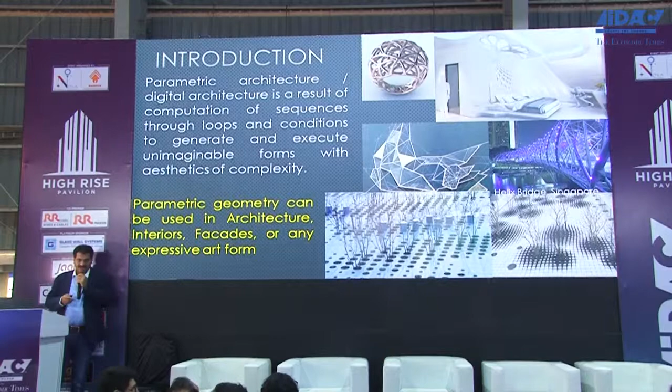So the parametric architecture or digital architecture, what is it? It is just a... Girish, you have to give the lecture.

So this is a sequence of loops and conditions, and we generate the form or the drawing which is unimaginable, undraftable - you cannot construct it on site. So you can really create very complex geometries. Parametric geometry can be used in architecture, interior design, fashion design, landscape architecture - in every art form.

Now why do we do parametric design? Because, as I said, we can create organic and complex shapes through various form-finding methods. When we say form-finding methods - in parametric softwares there are different tools that help you find the form which suits your requirement, things we cannot otherwise imagine. You can rationalize these forms, and then depending upon the requirement, material restrictions, and their properties, we can rationalize the whole built form. We can do interactive structural analysis.

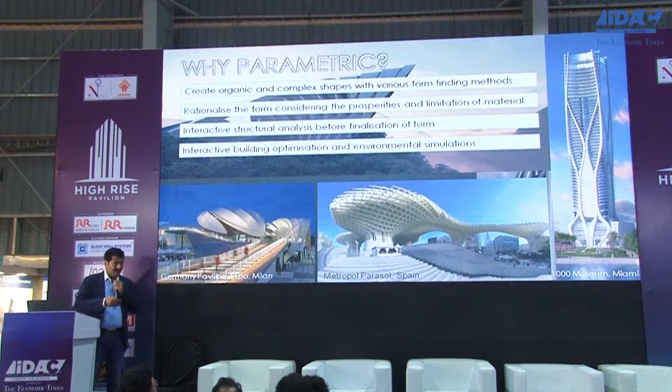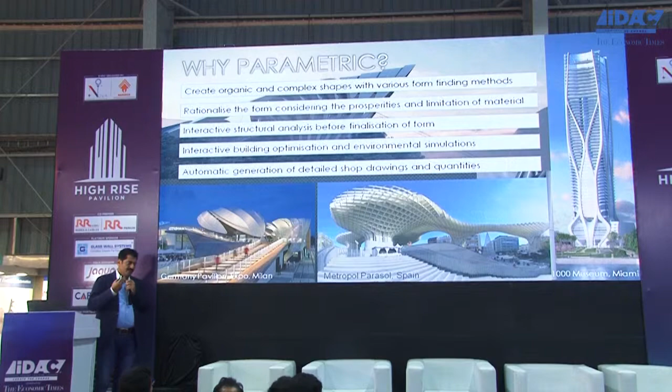We can do optimization in different environmental simulations. And then finally, as Jay was saying, the final output is always the shop drawing, which is directly fed to the CNC machine. I have come to a conclusion that whatever you do on parametric softwares, unless you use technology even for construction and execution - with the use of these CNC machines - you cannot actually execute them the way you want.

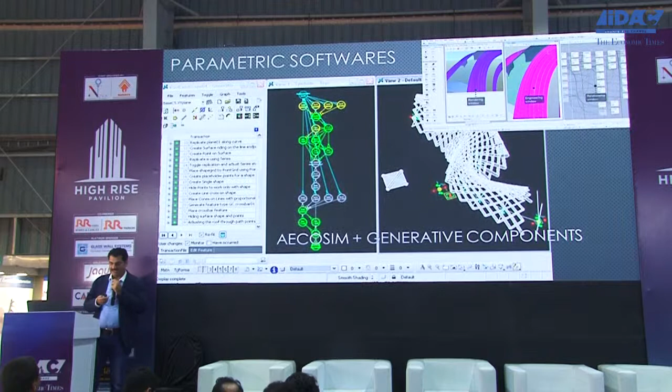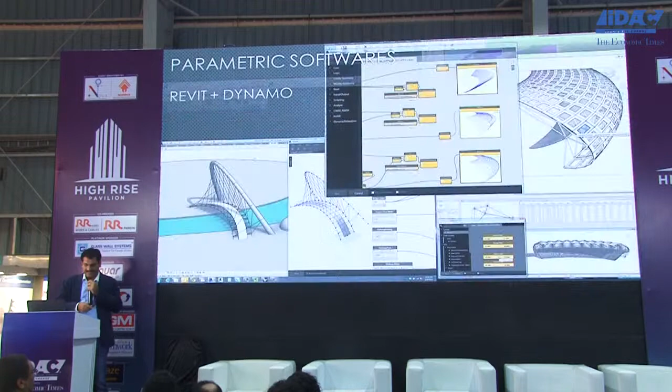Now there are different softwares. I started with a very basic software called Revit. I started using Revit in 2006, and the day they introduced a plugin for that, we started with it. Then a powerful software called AECOsim and generative components - we also tried that. Revit and Dynamo was my first experiment. Then finally we stuck to Rhino and Grasshopper. So most of my study, most of my experiments, are on this platform.

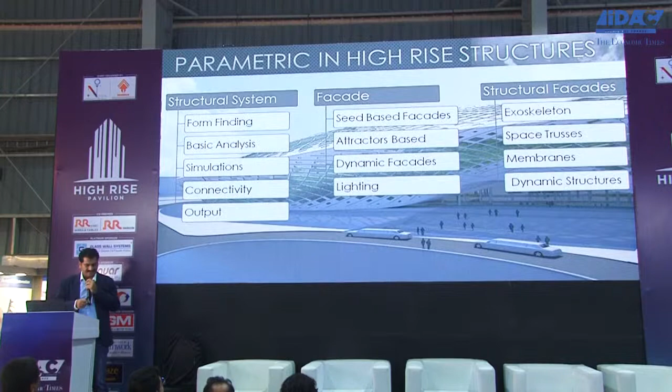Now when we talk about high-rise structures, where are we using parametric designs? In structural systems we can use it, in facades we can use it, and we can also use it in a composite way in structural facades. So the first is form finding, basic analysis of that form, various simulations you can do on it, connectivity of these parametric softwares with other softwares, and then finally the output.

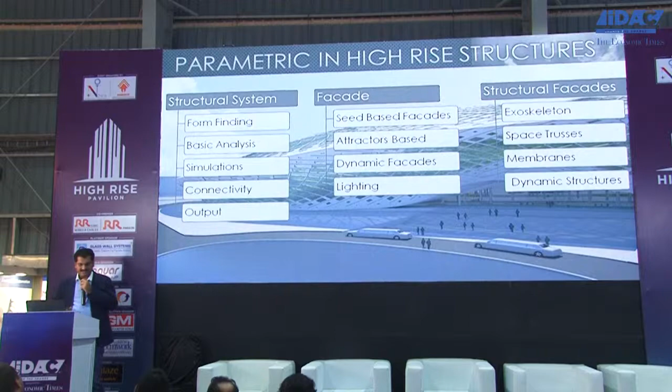In facades there are different types, we'll discuss that. And then structural facades like exoskeleton, space trusses, membranes, and dynamic structures. Now these are very futuristic. We need not go into that futuristic approach, but for any architectural design, you can use digital platforms like these parametric softwares, and you can come up with something which is very different.

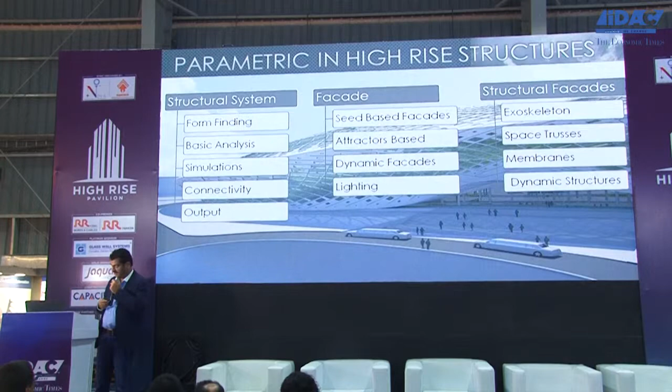So everything starts with form conceptualization. We use various software for even form conceptualizations, but then...

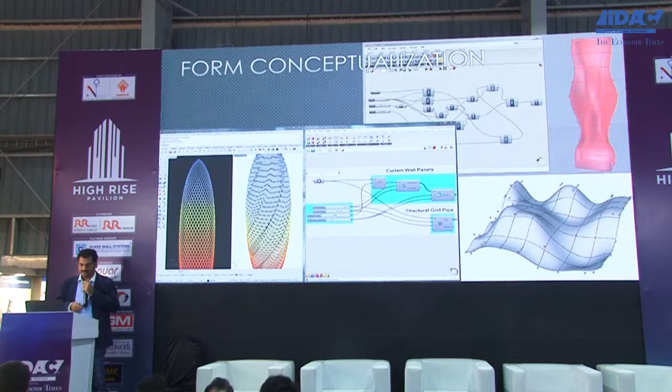So when we start designing a structure, the algorithm, the parametric software gives you full flexibility where you can actually decide on the final product at a very beginning stage. In a general system, we start with basic 2D drawing and reach the 3D drawing. Here the whole process starts with 3D and ends at 2D drawing.

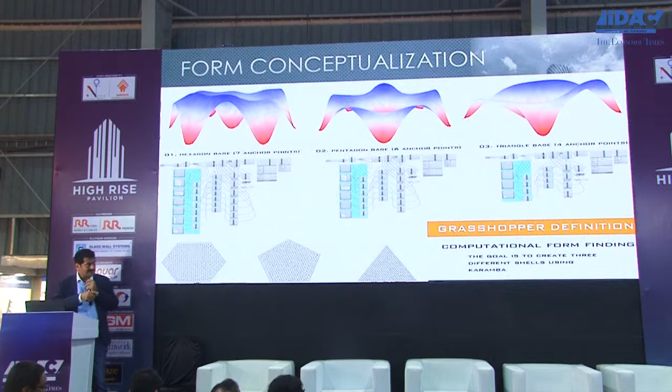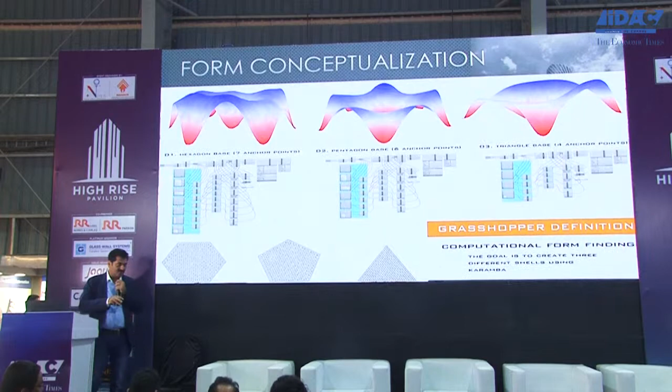So for example, if I make one single definition of an algorithm, by just a flick of a button, I can see the result where I get 7 supports, 6 supports, or 4 supports, and I can check, putting various checks onto it, I can see the possibility, the rationality of that structure.

This is one of my most favorite plugins. It's called T-Spline, an Autodesk plugin, and it runs in Rhino. Most of the buildings designed by international architects, in their presentations abroad, they have talked about this plugin, so we started exploring that. It's like clay molding, and you can create a form.

Unfortunately, in the latest versions, because Autodesk is a different software company and Rhino is a different one, they stopped supporting the new versions.

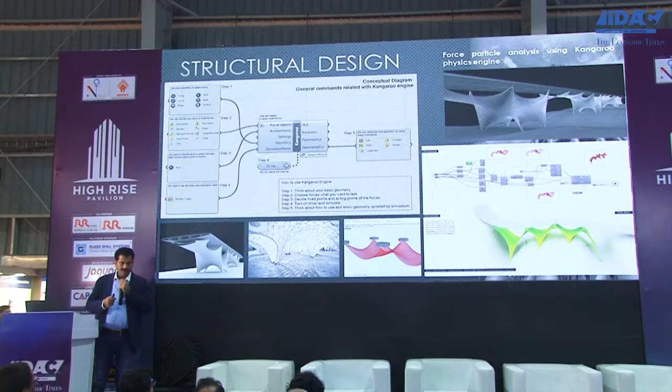You can do the structural design of these structures even before you complete the design. So these are a few plugins, like we use the Kangaroo physics engine for smaller structures, and we also tried a plugin called Karamba.

Now we want structural engineers to explore this further, because eventually most architectural firms are going to shift to these software, and plugins like this can help them a lot.

So you can see in the plugin, when we simulate, each and every node's displacement is measured and given, and depending upon the structure's characteristics and properties, we can decide whether the structure is going to stand stable or not.

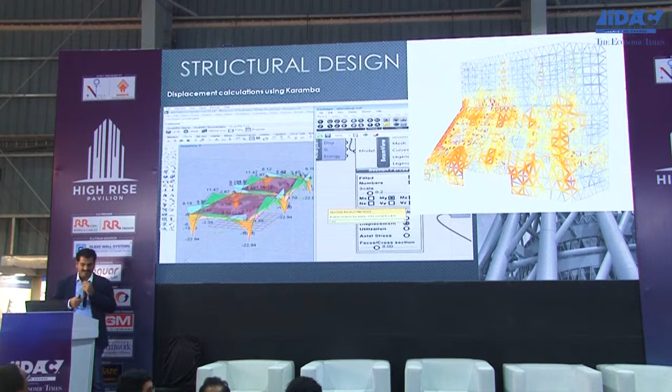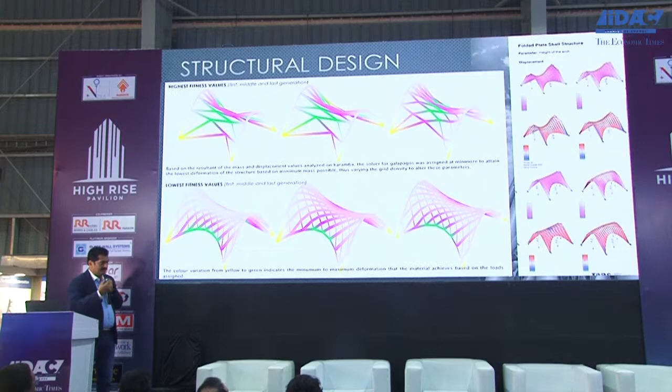And when I said interactive, you can see on the right hand side, it is giving me the form, and it is showing me in color the stresses, so that while designing the form itself, I can actually check the stresses, and I can fix the form. So that is what is interactive form finding method.

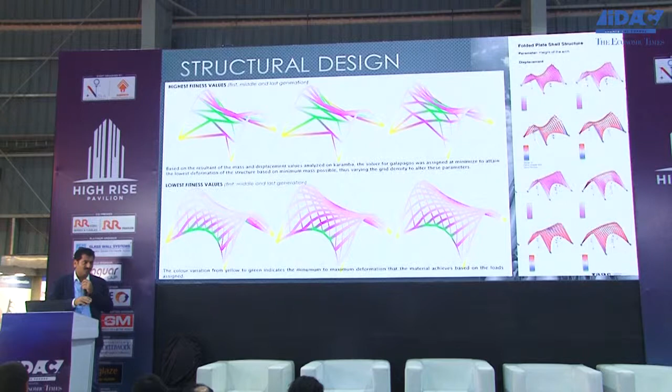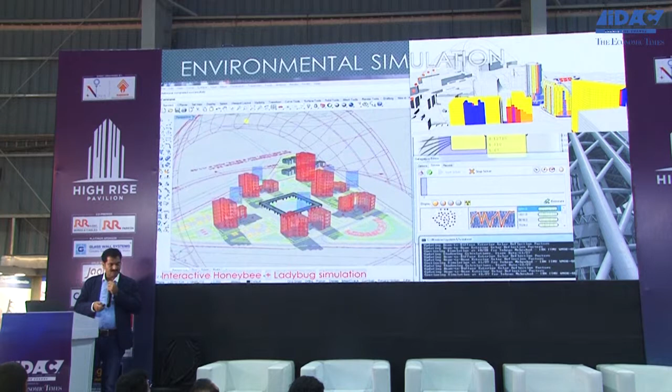Then there are different environmental simulations. These are plugins available in Grasshopper. We mostly use Honeybee and Ladybug. These software do various shadow analysis, solar control and radiation control, and even fluid mechanics.

So something like this can be done in Honeybee and Ladybug simulation, where it is actually showing the reflection of light falling onto the plaza in between two buildings.

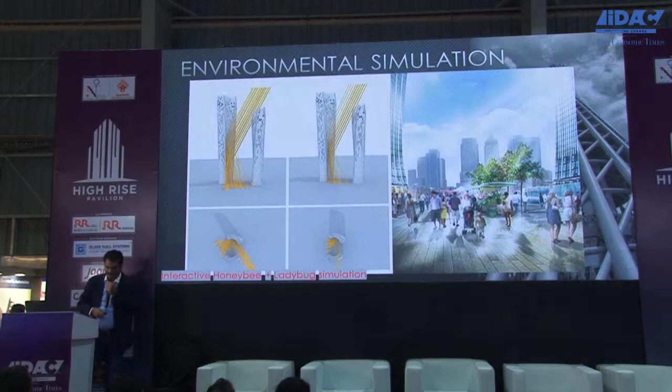Then you can do different simulations with Honeybee, including light penetration inside the building. The daylight factor you can actually see.

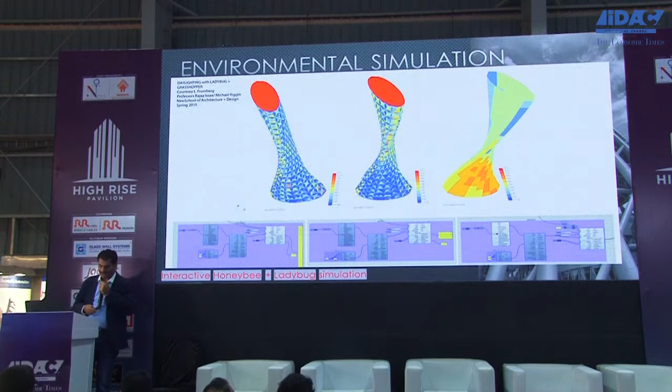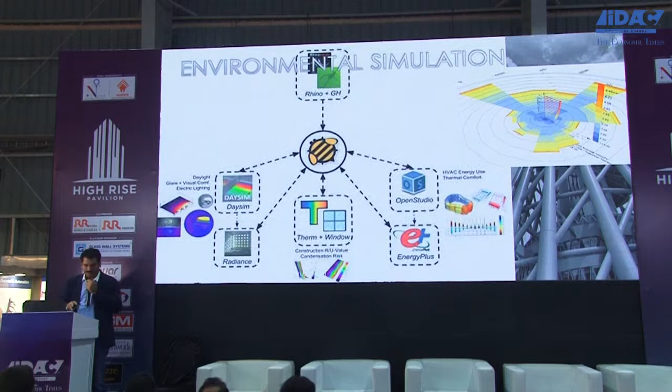And the best part is that Honeybee can connect your Rhino and Grasshopper with various other software. It supports different platforms like Daysim, Energy Plus, Open Studio, Radiance, and it's a to-and-fro kind of connectivity. You can connect this with your Rhino and do it interactively.

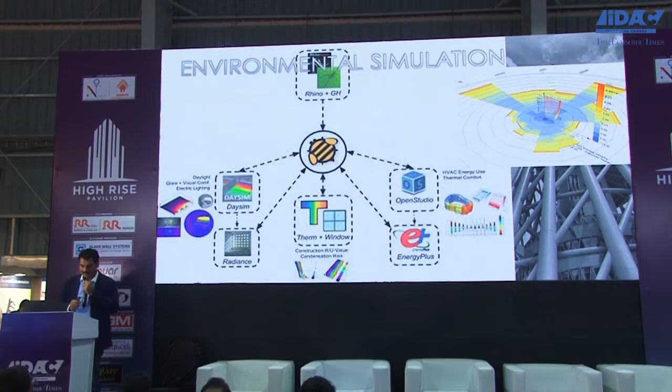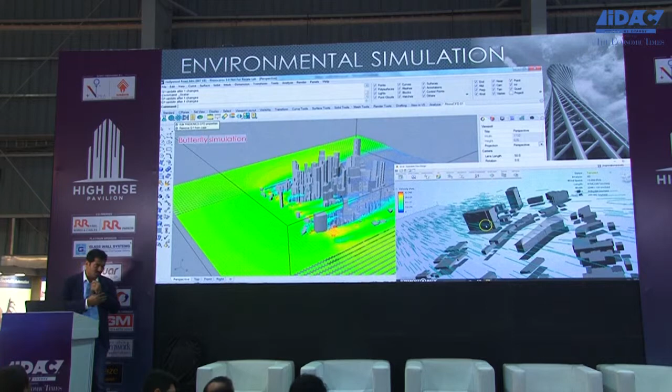With one more plugin called Butterfly, you can also do simulations for wind and also something like tsunami, so you can actually check how the whole city is going to behave in case of a tsunami.

So when we say form rationalization, the first thing is always depending upon the material, the sizes available. You can always write the algorithm to check the viability of your design.

Then you can optimize your structure by structural design, as I showed you. You can check its structural stability, you can check its facade simulations, and eventually, depending upon the machine you are going to use for final production, its characteristics and limitations, you can utilize that into your algorithm.

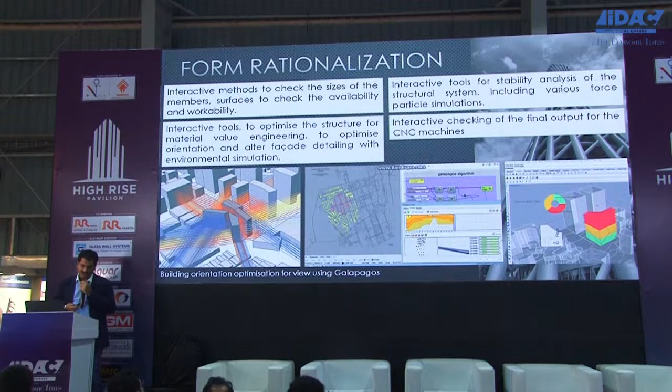This is an older subject where we wanted to connect our parametric software to building information modeling. We used to use software called Geometry Gym, which connected Grasshopper with Revit, and we got the output directly in Revit.

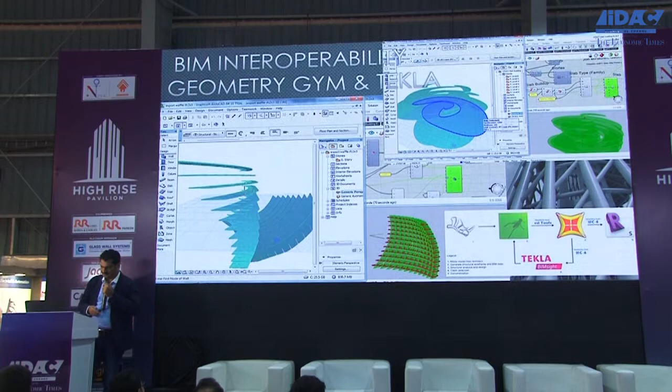But now with the latest available software, there is a very good combination. There is a direct connection between ArchiCAD, Rhino and Grasshopper, with a kind of interconnectivity between these software.

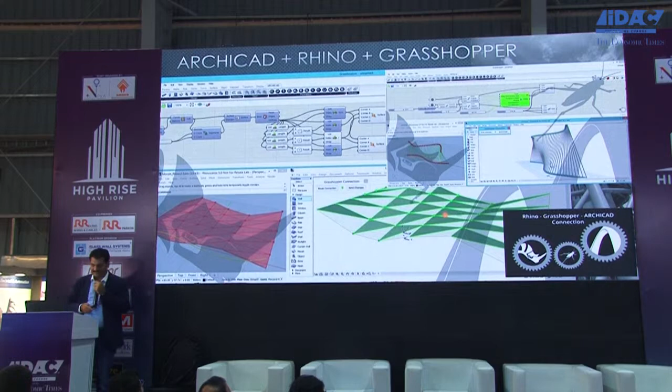So this was from the structure point of view. When it comes to facade, when we go for a high-rise building, I'll take you through a very fast journey of this because facade is a different subject altogether. Last time I tried to give this lecture, it was like a 1 hour lecture.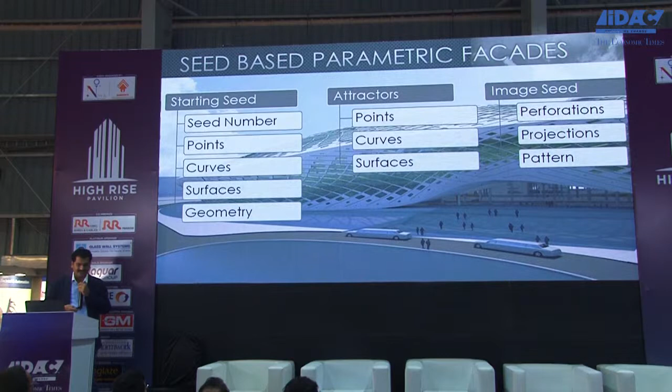So when I say seed-based facades, you can always start with something like a number, a surface, a line, or just a collection of points to start your definition of algorithm, and you can develop a geometry. So here in this case, we have got two sets of points automatically connected through an algorithm, through lines, and see the end result.

Finally the end result is those geometries. Now if you change those seeds, if you change the set of these points, the result will be something different. So in all these algorithm and parametric subjects, you don't really draft a drawing, but you write the definition of the aesthetics, and once you change the seed, you get a different output altogether.

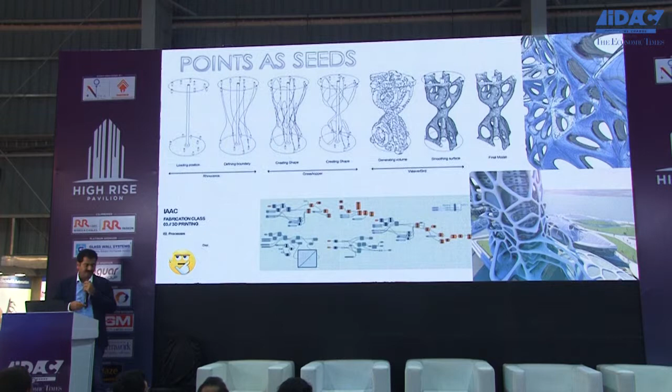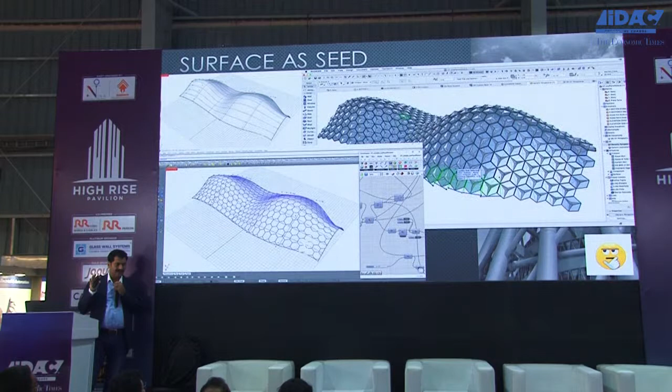So here I have used one definition on different surfaces. A variety of these surfaces are there, and see the results. Here, if you want the same into a facade, you take one geometry, you write a definition, here the surface is the seed. You change the surface, you will get a different result.

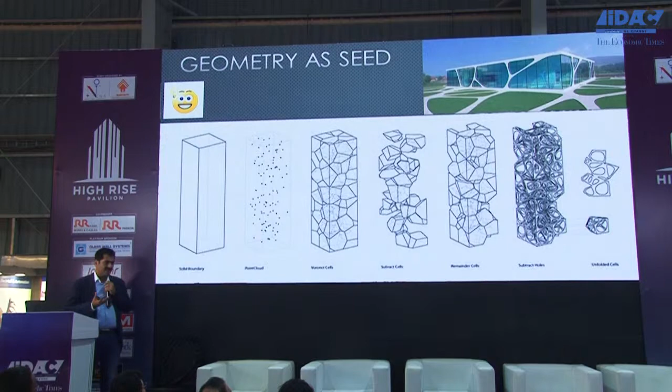You can use geometry as a seed. Here I have taken just one block, and then randomly the points are generated inside, and there is something called a Voronoi pattern that gets generated. Now if instead of this block I give a sphere as a seed, it will give me a different result altogether.

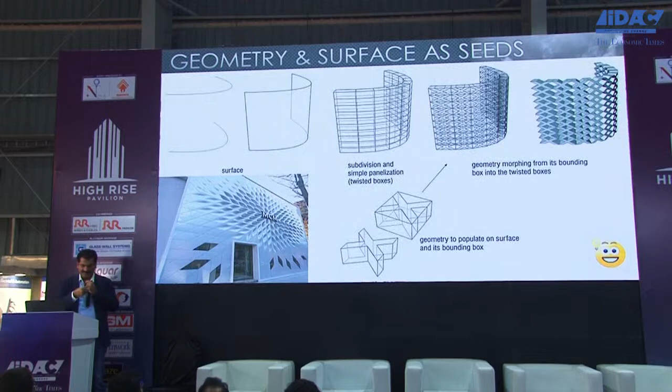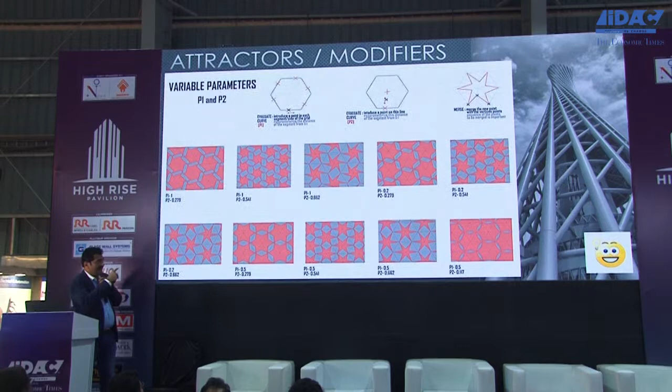Now when I want to make it a little more complex, I give some variables to this subject, like P1 and P2. If I give P1 and P2 variables and connect them with the location of that particular surface, we'll possibly get different iterations. So with the same one definition of aesthetics, I can generate a number of iterations, and that helps in how I use that into my design.

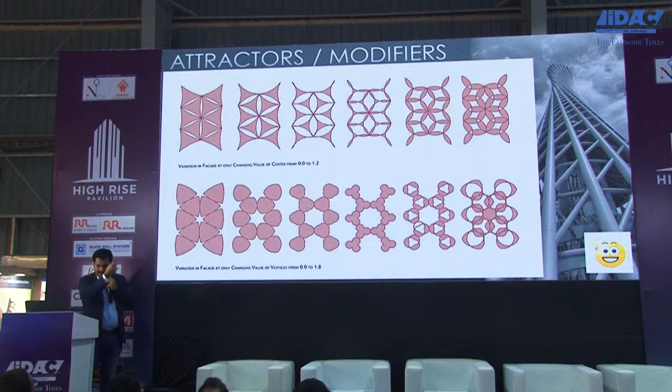So these are different sets of iterations. Same geometry with some variation gives me something different, and when I put it onto one surface, instead of a simple seed, I am using a variable seed. That variable seed will give me something like this.

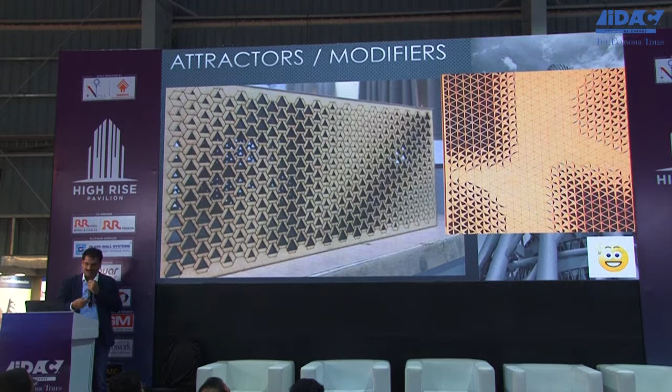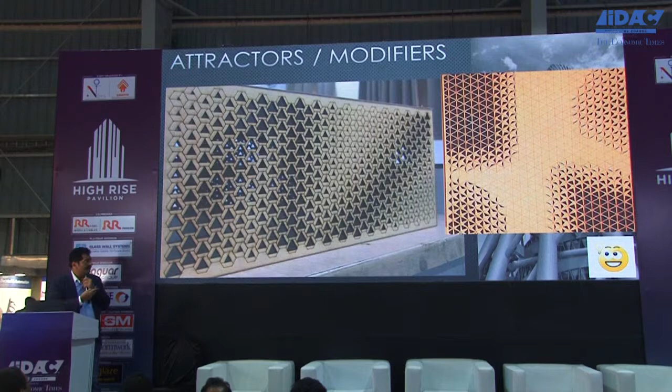So we call them attractors. Now here there is a curve which is visible. That curve was one of the attractors. Depending upon the location of an individual member with respect to that curve, it gives me a different iteration, a different alternative of that geometry, and that is how I am forming this complex shape.

These are a few examples. So we always know they look nice, but how we make them - that was the basic of it.

We can use them on high-rise buildings. This way you can make a very monotonous facade into a very interesting looking facade.

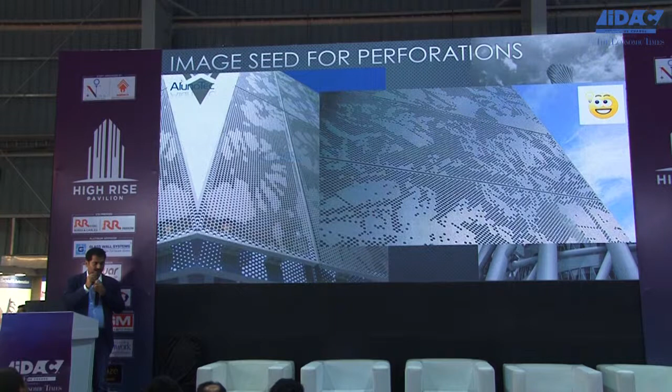So you can even use an image. An image can be your seed. You supply an image, any image, to your algorithm, and depending upon the image - the intensity, the brightness, or the color hue - you can actually give a different geometry to your facade.

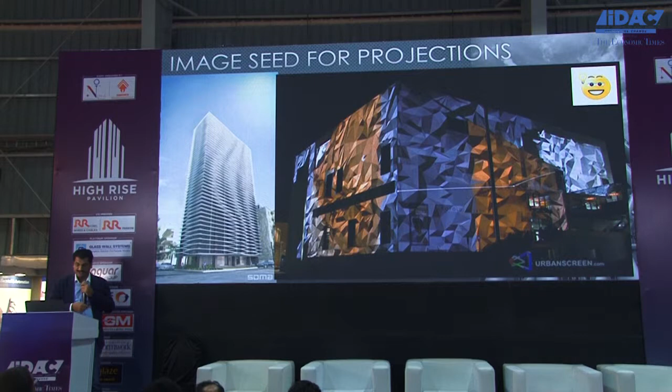Even something like this, where you are using that for projections instead of perforations, or something like this, where you can actually bring some triangulation with the help of some geometry.

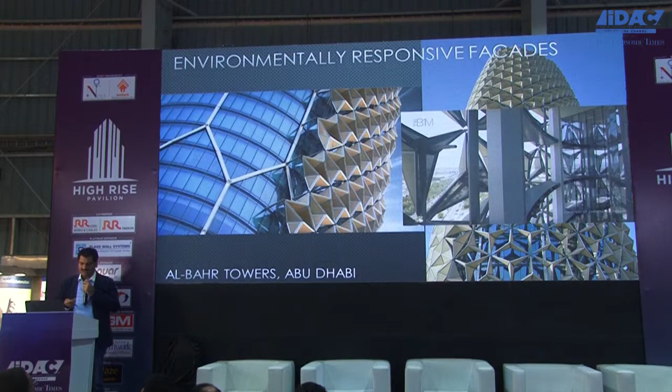And then there are these complex kinds of facades where you can see they are changing their shapes, reducing and increasing the openings depending upon the requirement from weather and climatic conditions. These are environmentally responsive facades, and it is proven that they give a lot of savings in energy consumption.

So there are a few more examples like this, where you can see those fins closing down and opening, controlling the light inside.

Or something like this, where the facade is moving. So these are basically dynamic facades.

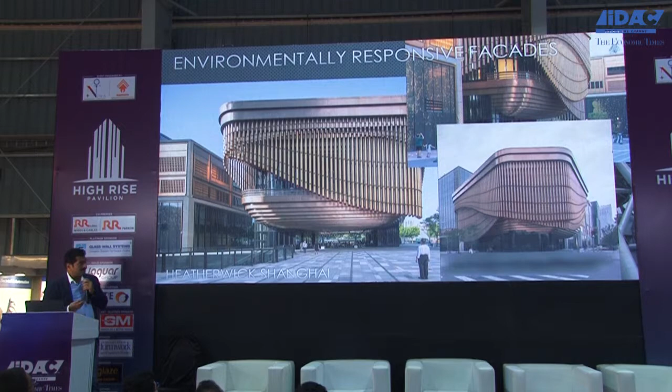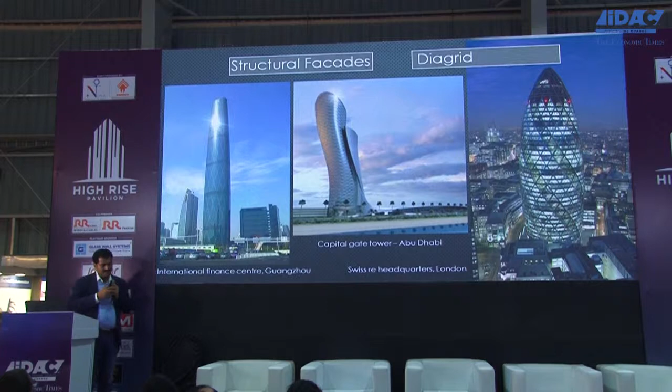Now when it comes to a composite of facade and a structural system, the most popular today is the diagrid. We saw in Carl's presentation that most of the time abroad they have a central core and peripheral columns. So instead of just having simple peripheral columns, there is a technique where you can use a skin developed with parametric software in a diagrid fashion.

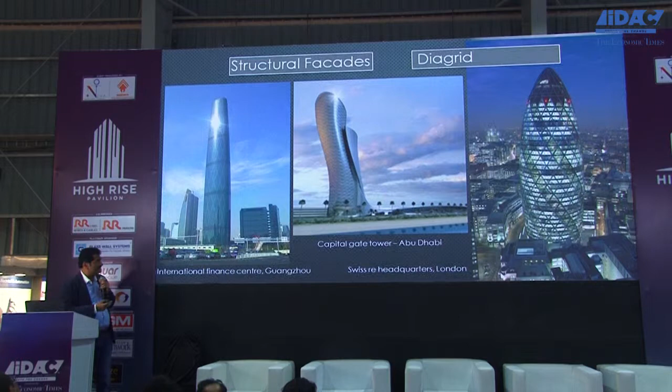So these are a few examples, and this is getting a lot of popularity abroad, even in India. Somebody is quoting that the first parametric diagrid facade is in Hyderabad, with those four towers coming up. I don't know whether Carl's firm is involved in that, but Sir Norman Foster is there.

This is the excessive use of the technology. We went to visit this structure in one of the CTBUH conferences. After the presentation was over, we decided to see this building. We went there and thought this is really ugly, but it is something they achieved with a lot of effort. I don't think the effort was worthwhile, but the building is unique.

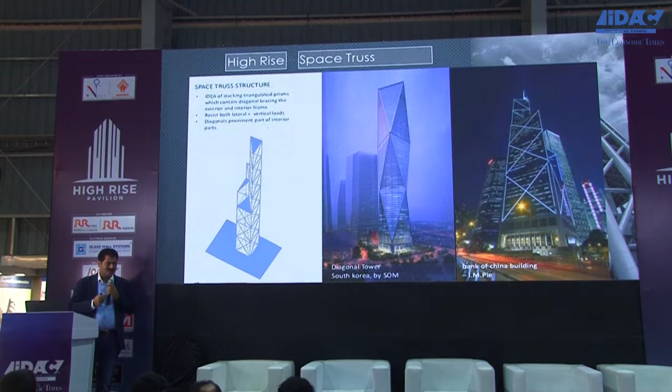The other way you can use parametric software for form finding is space trusses. In space trusses, you can evolve a form and do a number of iterations. Like Jay was explaining in his previous presentation, with a seed you can develop almost 10,000 options. He took 10 days, but the software actually takes only 1 minute, so you can generate 10,000 options in 1 minute and then select one out of them.

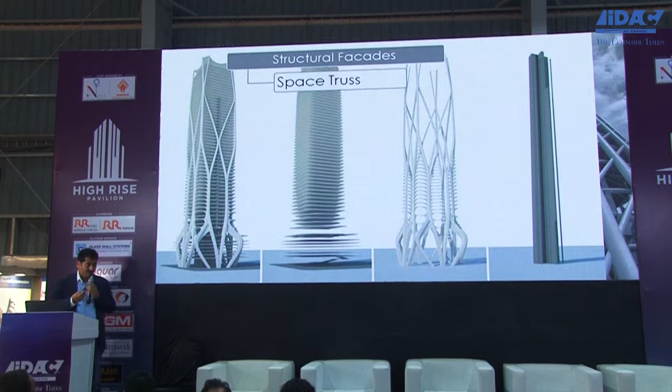So these are some examples. A space truss, a complex form can be developed. You can use membranes for structural facades. This is an age-old example. The first of its kind, I think this was the first tower they built, 50-story plus in Dubai. And finally the boldest experiment they did is this rotating tower. Because of that parametric shape of the software, it's not just evolved as a parametric design, but it's going to change all around the clock.

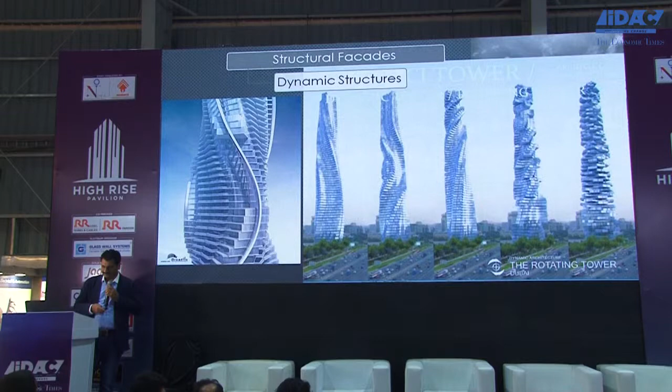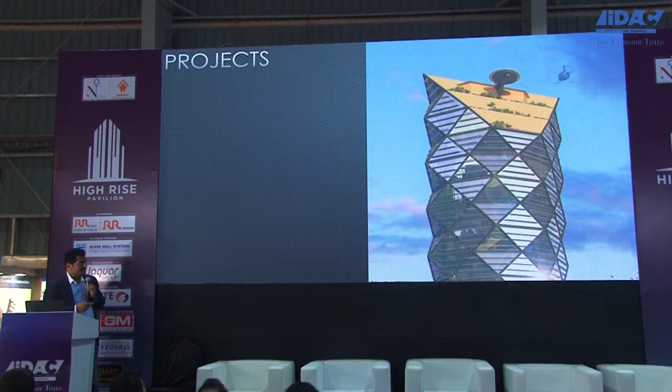These are a few projects we are experimenting with. We tried parametric use first in one of my projects, One Avighna Park. We designed its crown with this parametric approach, and that whole structure is like a 12-meter tall steel structure from the terrace level. This is a 61-story building, the tallest residential occupied building in the city, and this crown was to be erected on top of it. We calculated each and every joint through the software, and now it is complete.

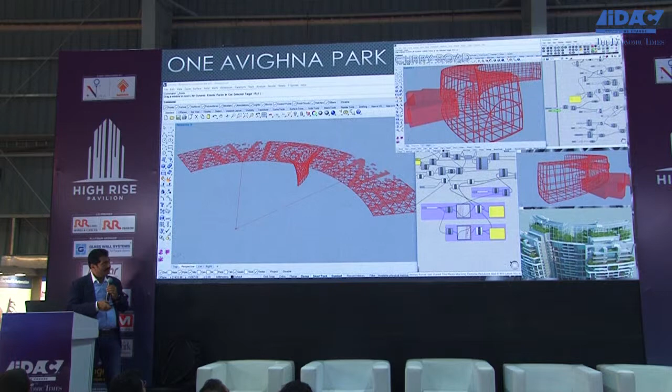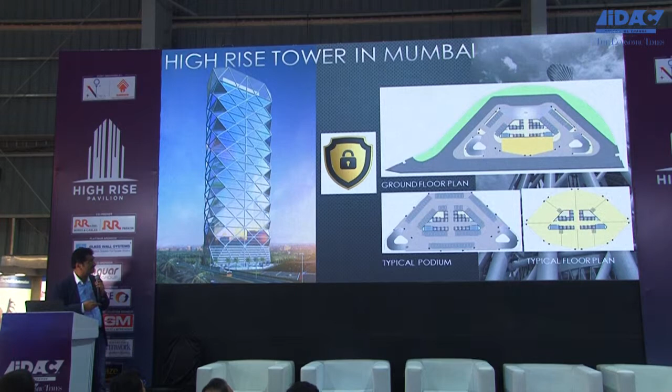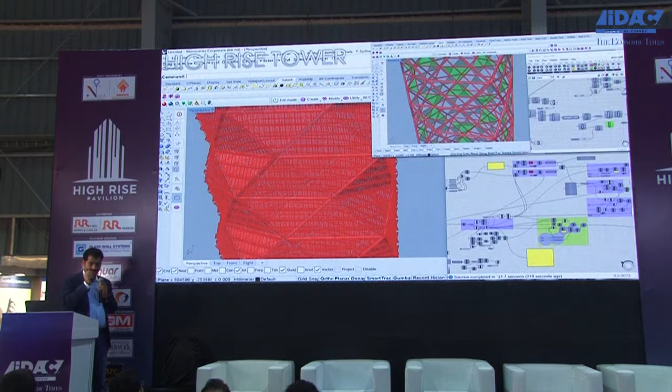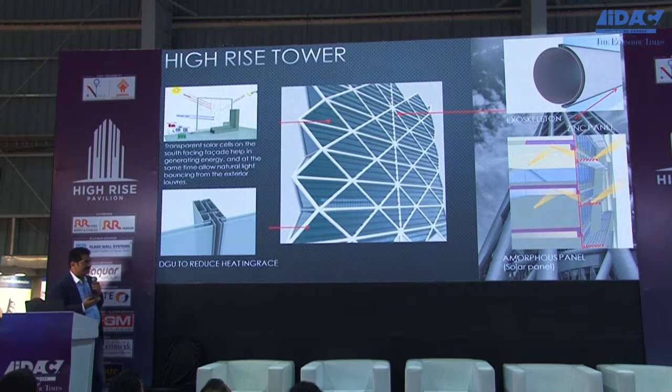It's already occupied as well. Now we are doing one more building, this one in diagrid. This is supposed to be the tallest and biggest commercial building in Mumbai. The work is already allotted. Tata Projects are the contractors for this, and we did the whole design on algorithm, including each and every panel and each and every mullion designed. As I said, the exoskeleton is the next popular subject that is going to be there in India as well.

This is the next project we are going to do. This is supposed to be taller than the Eiffel Tower, 30 meters taller, somewhere in Gujarat—I cannot tell you where. We are doing this for Steel Authority of India. When they announce it, we are at the finalization stage of the design.

And I'll invite Girish to explain the next slides. These are your slides. Hope you know them.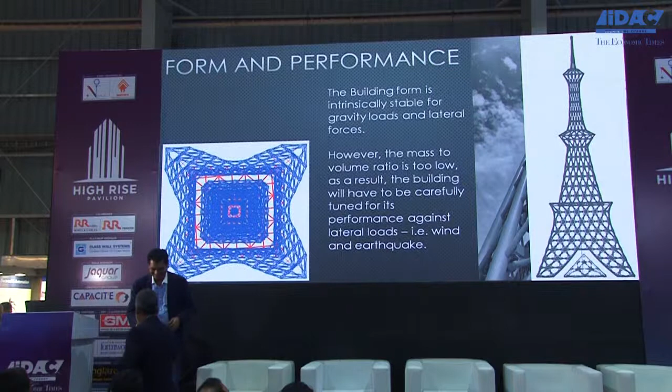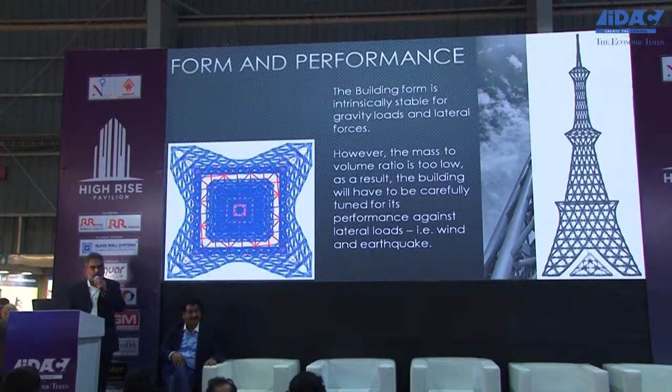Vivek approached me with this unique project. SAIL, Steel Authority of India, wanted to build a building in steel, and somewhere—now he's talking of Gujarat, but when he approached me the location was not finalized. As a structural engineer, we get into the rut of earthquake zone and wind zone and soil parameters and all that kind of stuff. But when he explained to me how he came up with the concept of the shape and the facade, I said okay, let's take a back seat. The structural design is not important.

It's going to happen. In fact, I don't have to do any structural drawings, because this is one kind of building where the form itself, the facade itself, is so much structural. It's going to be a self-supporting building, and whatever I do is just put it on paper or in some kind of software, give a file to the contractor who will CNC the facade elements and fabricate them. This is all we are going to do.

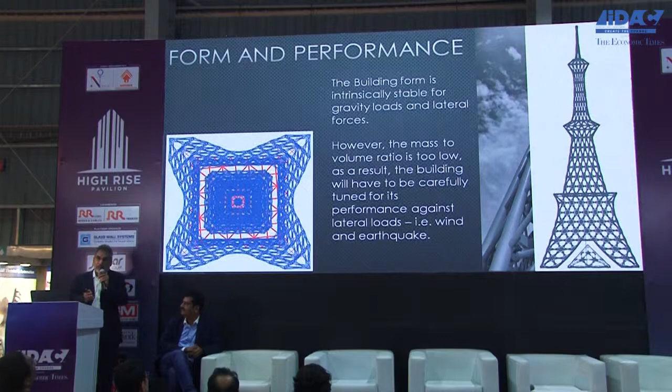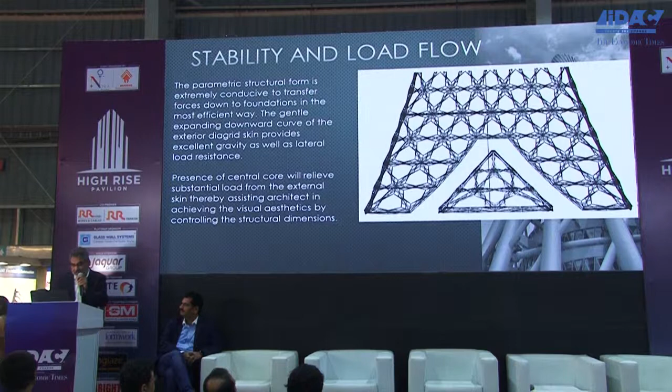As regards the location-based parameters like earthquake and wind, I'm sure the software itself—when he says the structural design will happen in the initial stages itself, when he's making the form of the building—all those input parameters can be fed into that software itself. Everything will be confirmed, and in this geometry, the geometry itself is self-stabilizing. It's a tapering building, so as an overall form there is no much structural challenge here. The problem will lie only with the load flow.

The gravity and the lateral loads have to reach the foundations, and the diagrid system followed here is an excellent way of transferring the forces to the foundation. So there is no problem.

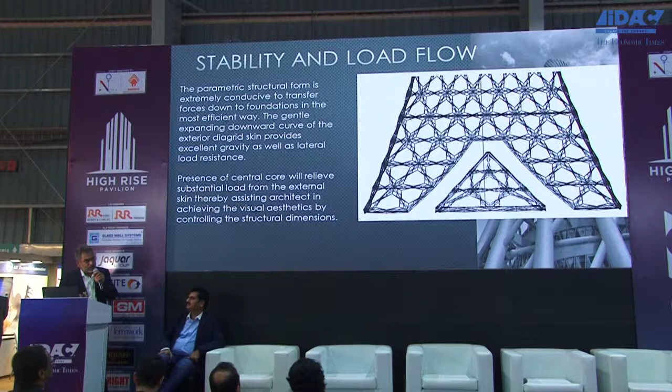But to be on the safer side, we both decided that let us have a central core as well. In any case, this was required because there is a restaurant on top of the building, as you can see here. So you have to reach that place, and in any case, you will need vertical transportation. So the cores required for vertical transportation themselves will add to some kind of stability.

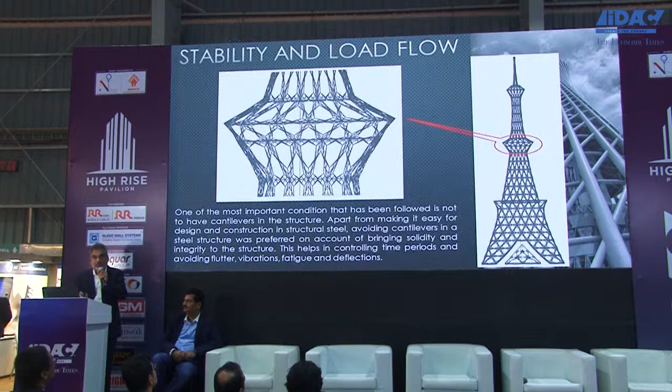There was some other discussion regarding how to make this form integral. And instead of having a cantilevered restaurant, we decided to just have the form itself take the shape. You can see the highlighted portion where the form has been curved to create that bulb kind of thing which houses the restaurant. So that adds solidity to the geometry.

Although the title of the slide is Fabrication and Erection, I don't believe anybody is going to have fabrication drawings to make this kind of stuff work. Every star-shaped panel will be of different dimension because the building is tapering, the number of stars are changing. So this is going to be completely automated fabrication, which is possible nowadays. We have been doing some very complex buildings where it's not possible to draw fabrication drawings.

Everything will be given in the form of algorithm files to the contractor, and the CNC machine will take the inputs and start cutting the plates, the members, and even the welding will be done automatically.

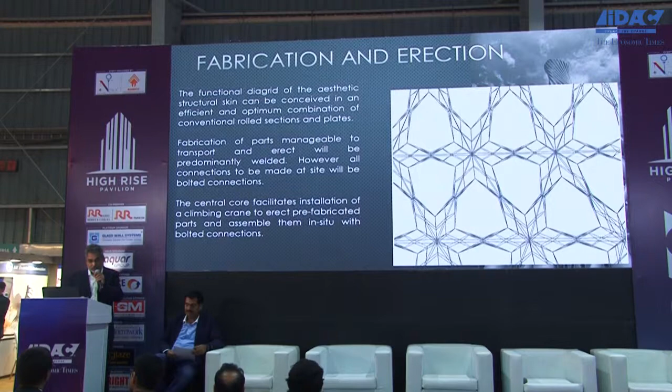So major parameters, of course, will be wind and all that, and it will be taken care of. We have designed this building for the entire range, 44 meter per second to 74 meter per second. Probably RWDI will get this project very soon to have it tested in a wind tunnel.

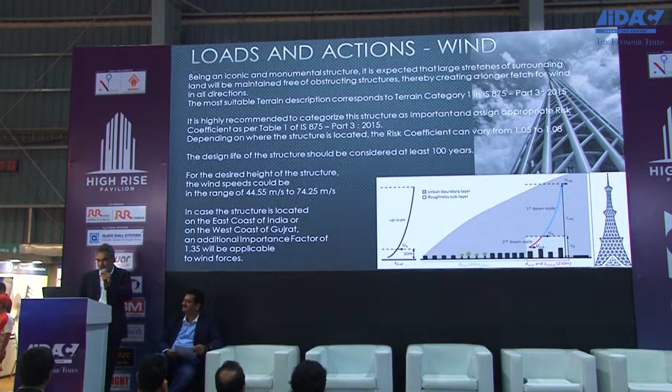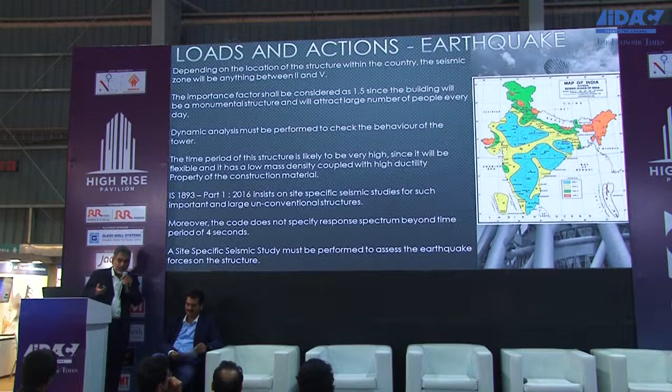I think for the earthquake zone, again, it was not decided where the building was located. In any case, this form is so stable, I'm sure I can build it in any earthquake zone in India. What will change is maybe the plate thickness of the steel here and there, but it's going to be absolutely fantastic. The most important aspect of this building, however, will be the foundation.

This is going to be a building more than 300 meters tall. What is the exact height? About 300 meters. So the toppling effect is the only thing that I have to tackle at the foundation level.

The wind-induced toppling has to be resisted by a mass at the base. Remember, this is a steel building, so the building itself will have very small mass compared to its volume. So earthquake is not all that important a factor, but the wind is.

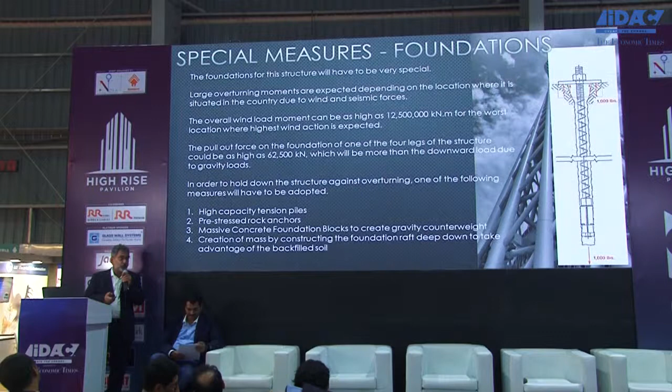I have to create a massive foundation to stabilize the building, and probably that will be the toughest challenge, because even our concrete technology is not all that advanced as our steel cutting technology is. So I think that will be the major challenge. Probably we'll have to go for some kind of tension piles somewhere, or pre-stressed rock anchors to hold the foundation pinned to the ground.

The spire is the most important aspect of this building. That itself is, I think, about 75 to 100 meters tall, and there is bound to be some kind of flutter or high accelerations in that part of the structure.

This building, however, is going to be occupied at the restaurant level by human beings. So it is very, very necessary to control the accelerations in the building. We cannot just wish away that it's a monumental building not going to be occupied, but it's going to be a restaurant. There will be a lot of wine glasses and cutlery and all that. We should not start flying off here and there when people are going to be there.

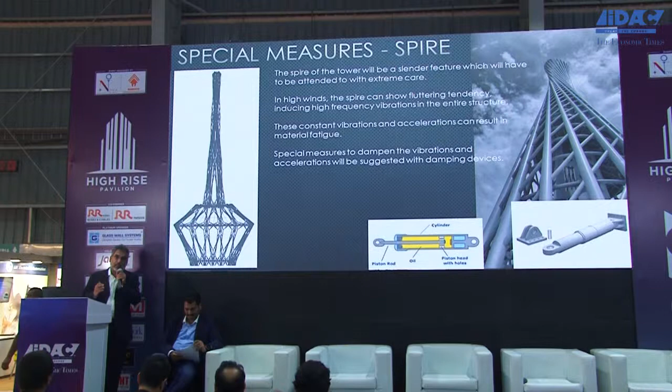So controlling accelerations will be very important, and for that, since that spire has a very small plan dimension, only some kind of viscoelastic dampers can take care of the acceleration. So I think a lot of damping will be required for this building, because again the building doesn't have its own intrinsic mass, so there has to be supplementary damping in this building.

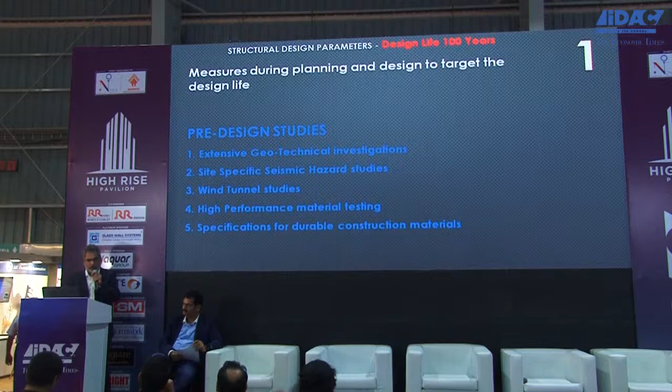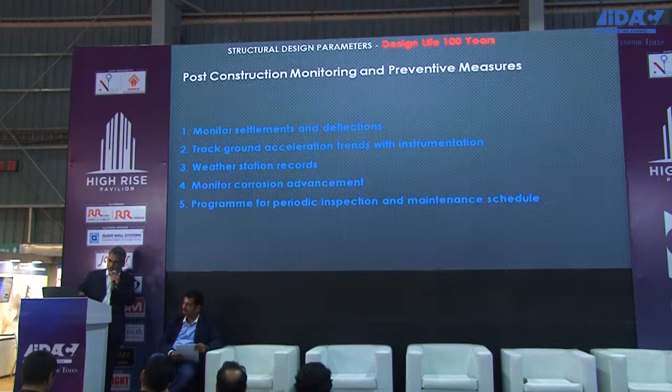So all these things have already been preconceived, and we'll be going through all these pre-design studies, material testing, wind tunnel, and site-specific seismic studies and all that. All these preventive measures we have already thought of.

So do you want to add something to this architecturally?